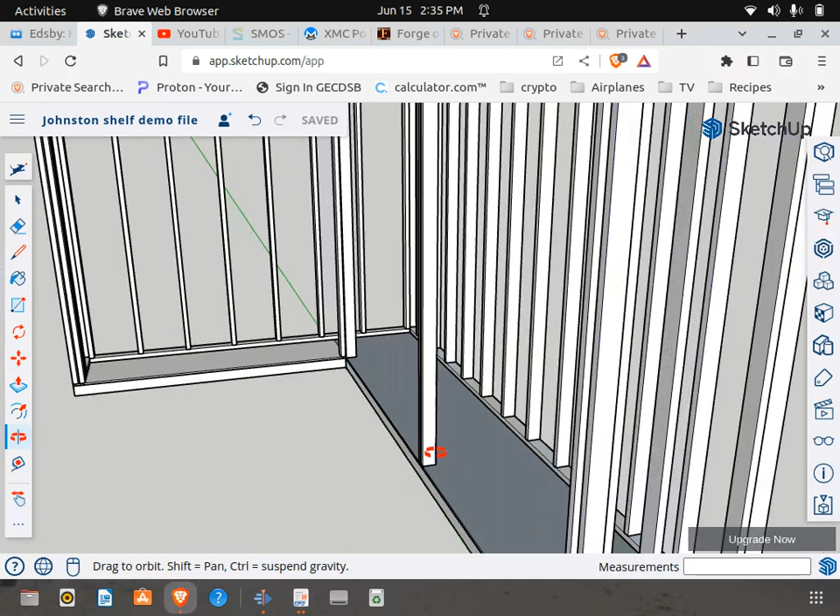So this lays out the location. I'm going to go over to here's my shelf right here. Now because the locations are given on this middle one, I'm just going to lay them out here. So let's just look here. The first shelf, the bottom, is located 3 foot 2 3/8.

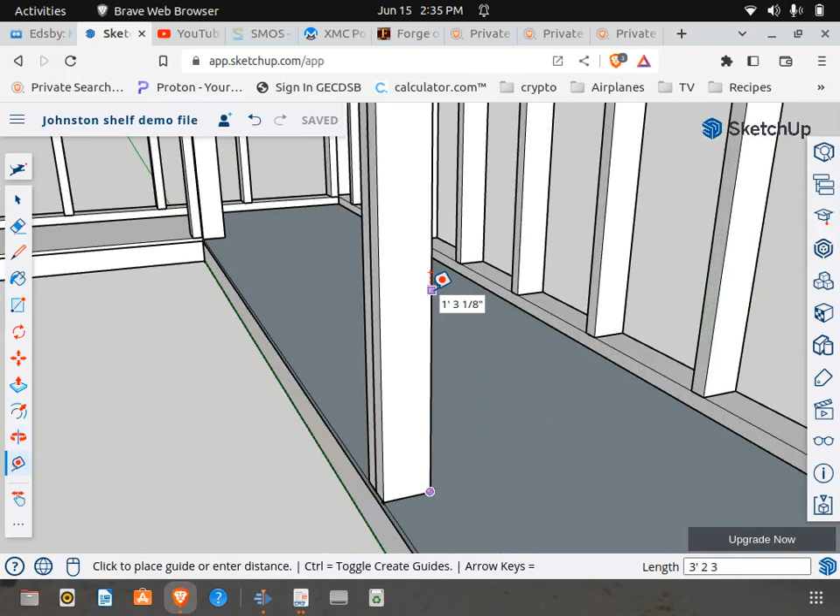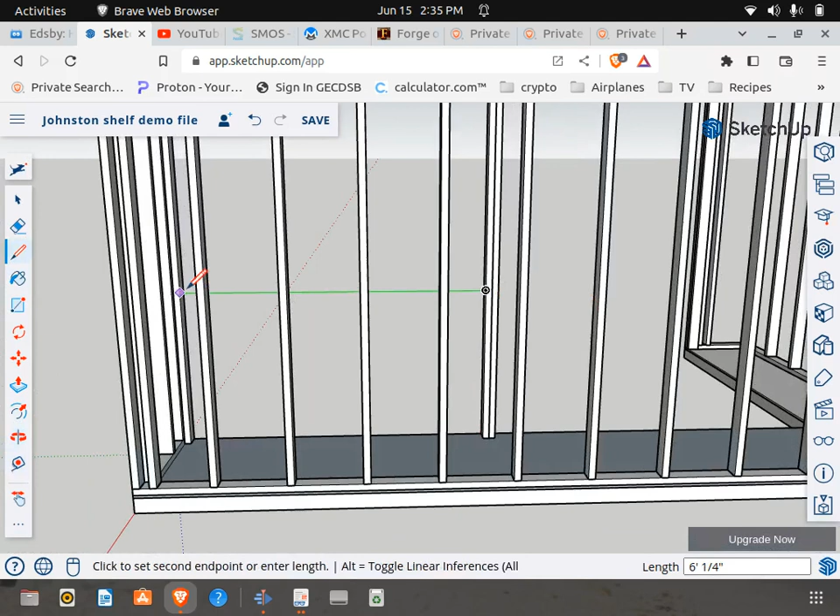So let's lay that out. Grab my measuring tape. 3 foot, 2, 3/8 of an inch. So we've got that. Now what I'm going to do, since I've got that, is make a quick line all the way to my corner, just like so.

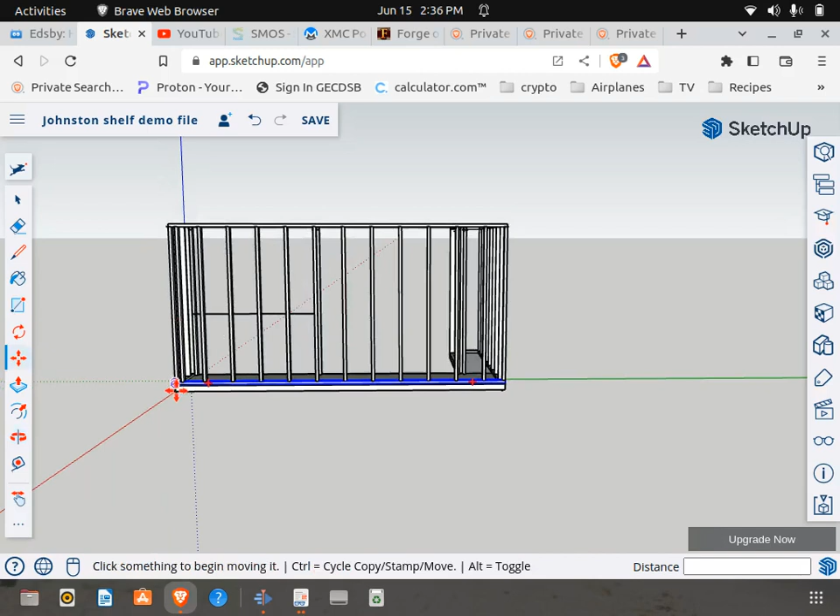Now there's two options. You can draw your boards, which is up to you, or you can use existing boards and edit them accordingly. I'm going to do option number 2. I'm going to grab this board. I know it fits because it's the longest board.

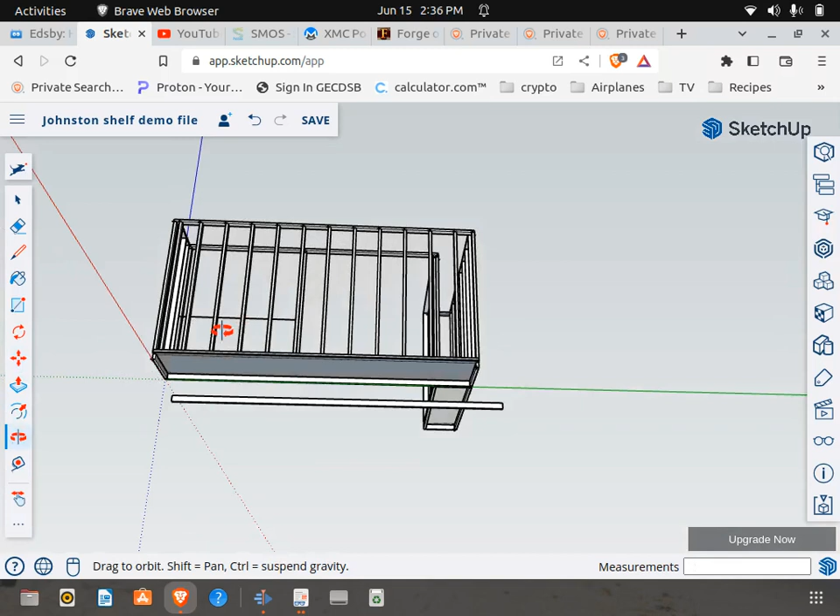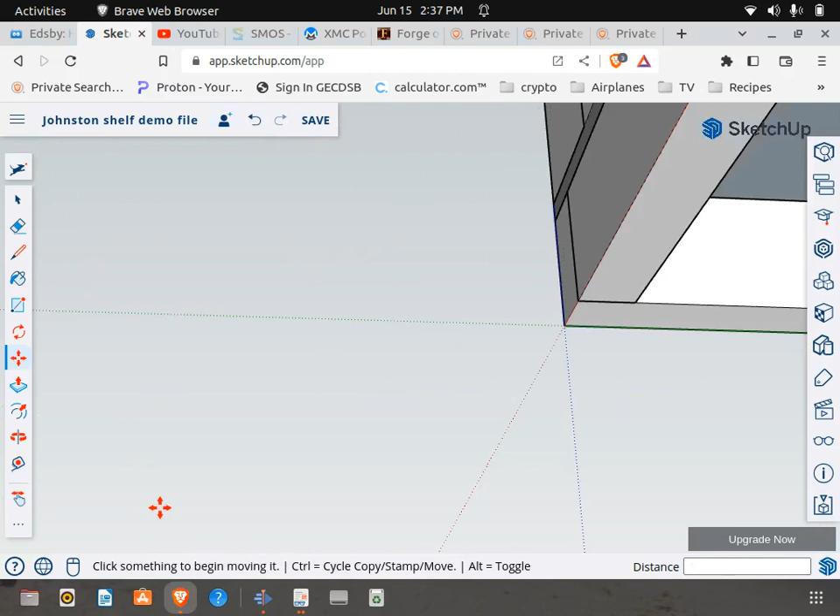Grab it by that corner. Actually, I'm going to grab it by the bottom corner because that measurement is for the bottom of the shelf, which would be that corner there. So let's cruise up into, oops, before I get too far. Looks like I didn't copy that. I accidentally moved it. Okay, there we go. Let's grab that corner and okay.

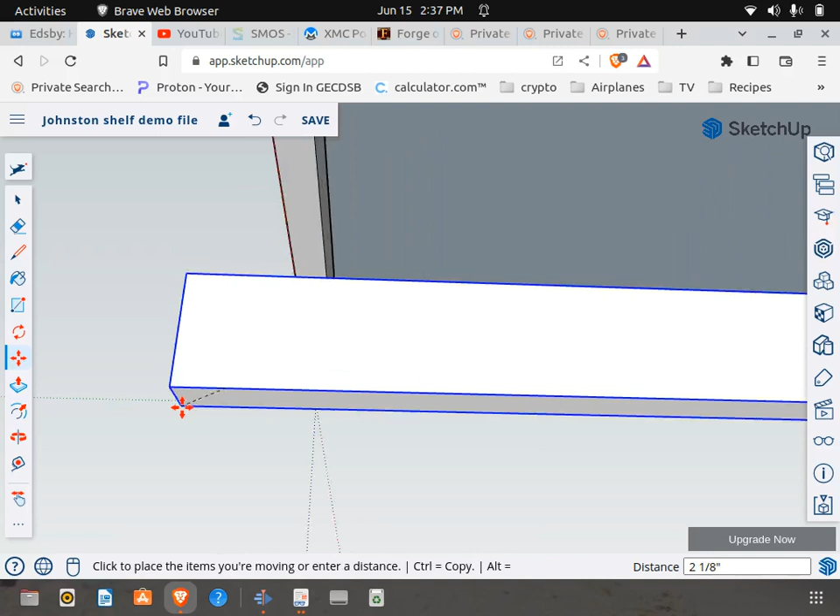Okay, another little, here we go, minor hiccup. Just get back there. Okay, drag along that line till you get to that corner. And that's where that bottom shelf is going to sit.

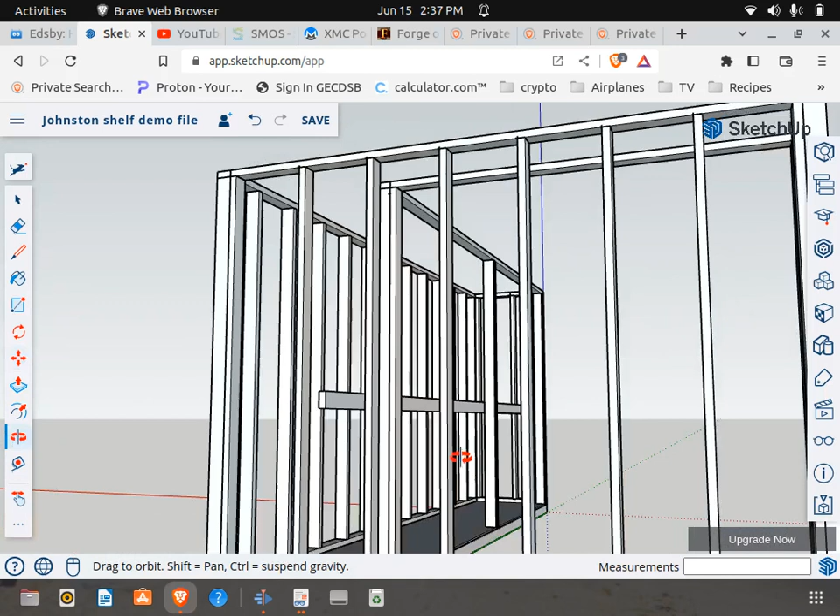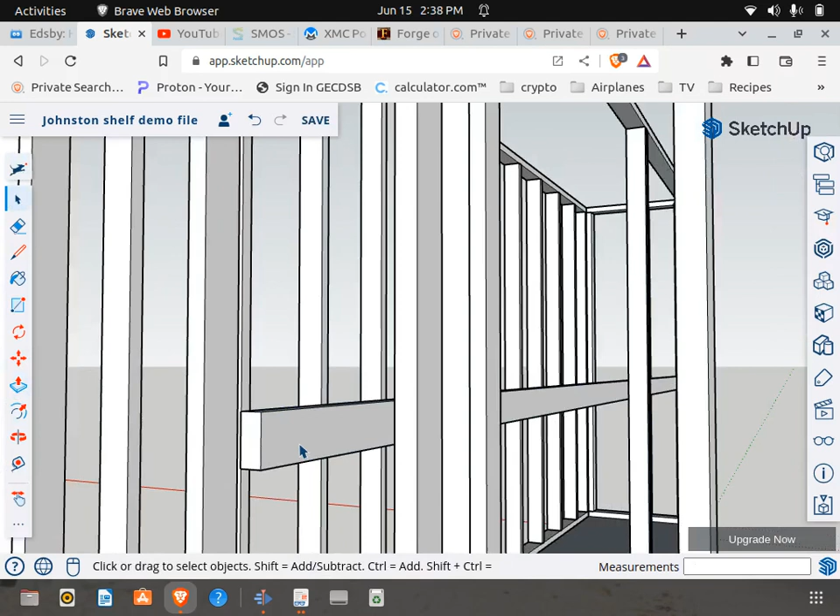Now obviously I'm not just going to leave it hanging like that. So what I'm going to do, I'm just going to make this unique on the off chance that, if it's not unique and we make any changes, the location that we took it from is going to receive the change as well. So let's just edit this now unique component. I'm going to push this back to about here. Sounds good.

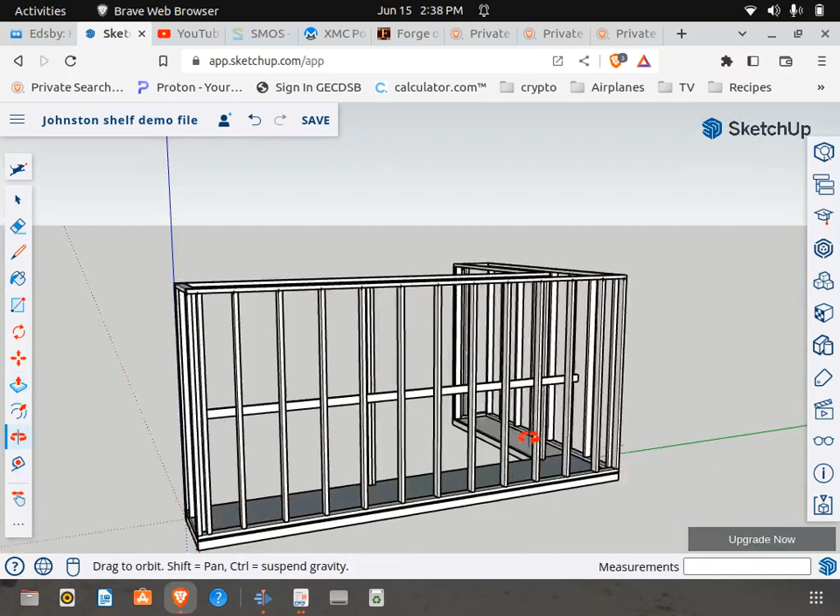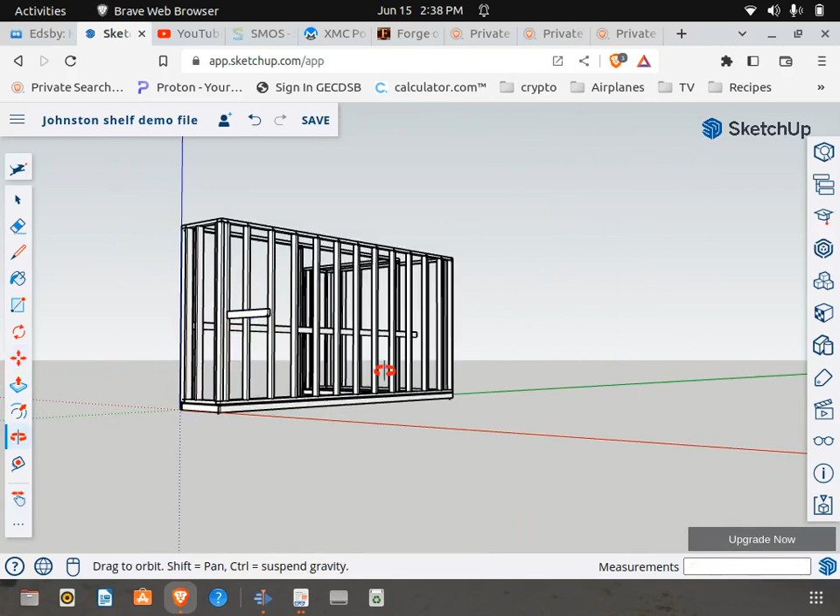So we've got our first board in. Now once again, I'm going to grab an existing board and copy it. So let's grab this one. Okay, making sure that we copied it, we didn't accidentally move it. And tell you what, before we forget, let's make that one unique.

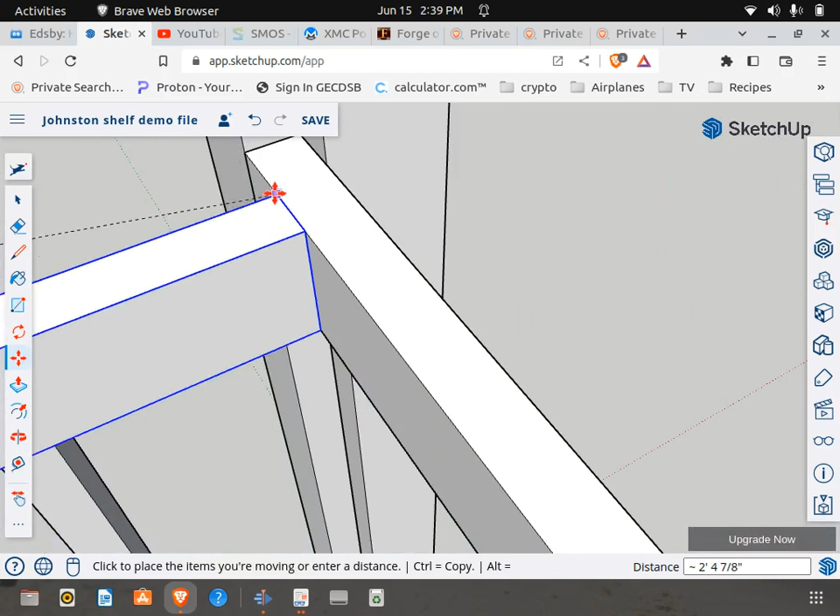I'm going to grab it by this corner here, and let's drop it off right next to this one here. Okay, wonderful.

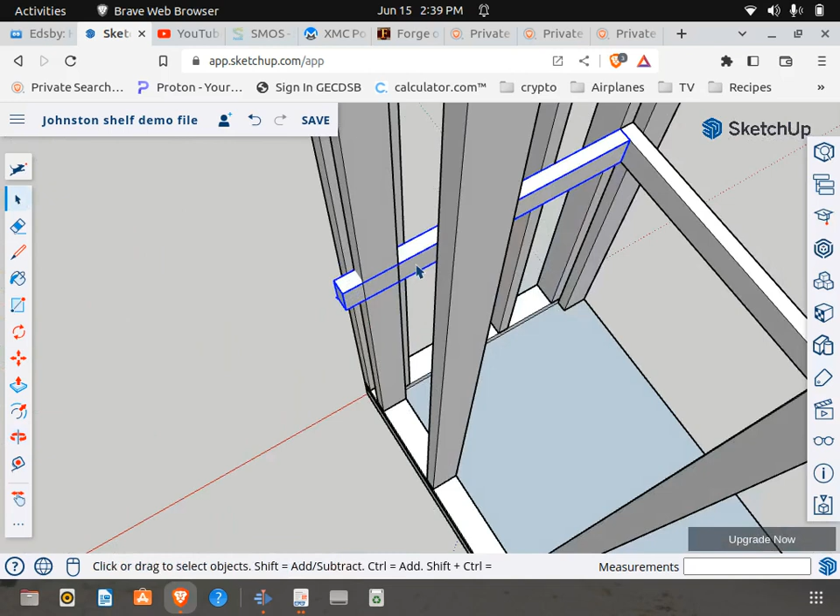Now what I'm going to do is, okay, so there's one of two things you can do. I'm going to edit this component for sure, and I'm going to push this back to this point here. And you see there's a space. The reason for that space is I would like to place the longboard in that corner.

So let's copy this one. Don't need to edit it because it's going to be the same, or it should be.

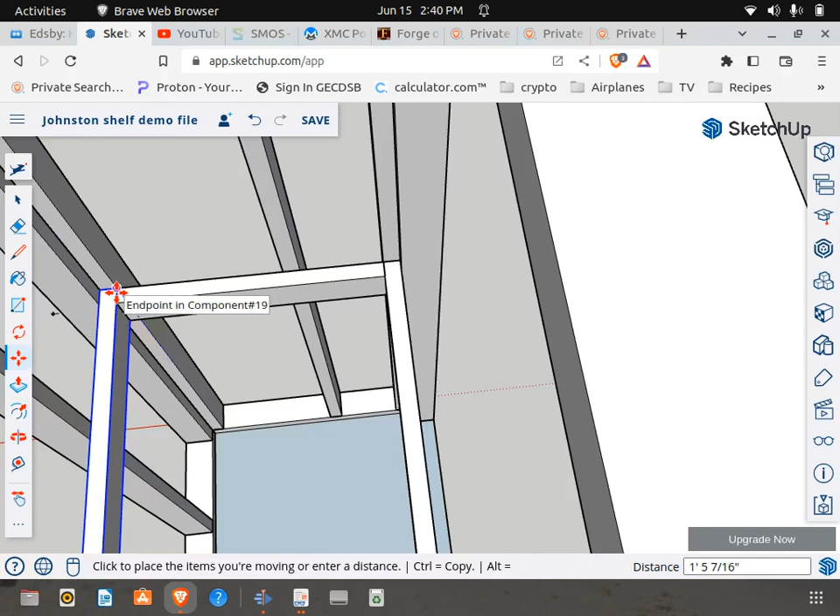Let's just make sure we've got our corners lined up. We do. Okay, let's spin this around and make sure everything fits in there nicely. It does. Okay, so let's grab that board over there.

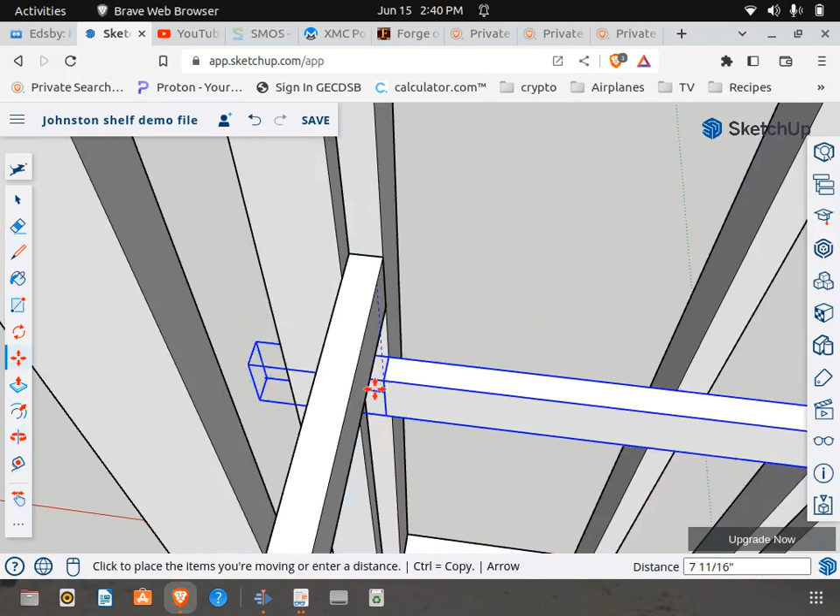And copy it. And let's just drop it off over here, just like so. And everything should line up nicely, just like that, and it does. Okay.

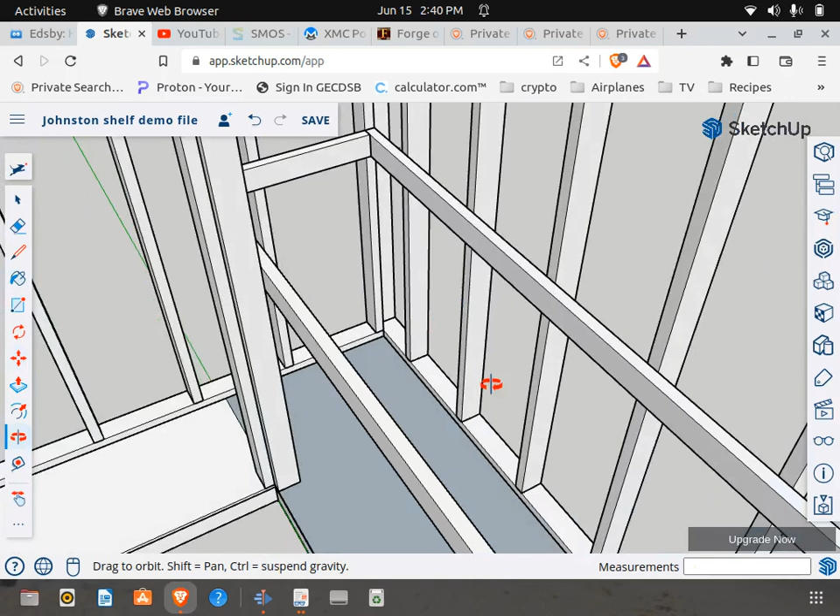Now it's our first shelf. So now what you're going to do, if we look at our instructions and scroll down here, there's our board. We're now going to add a 5/8 piece of plywood to this. There's a variety of ways you could do it, depending on how things work for you.

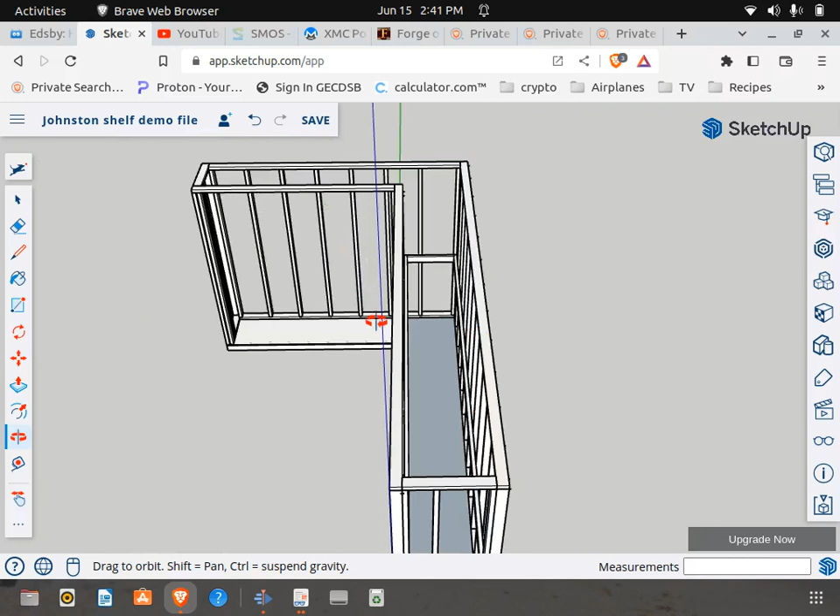Okay, so let's try our rectangle option and see if that will work for us. We'll just cruise this around and get in there, hit escape, and drop that off. Now let's see if it's going to let us bring the whole thing up. It does.

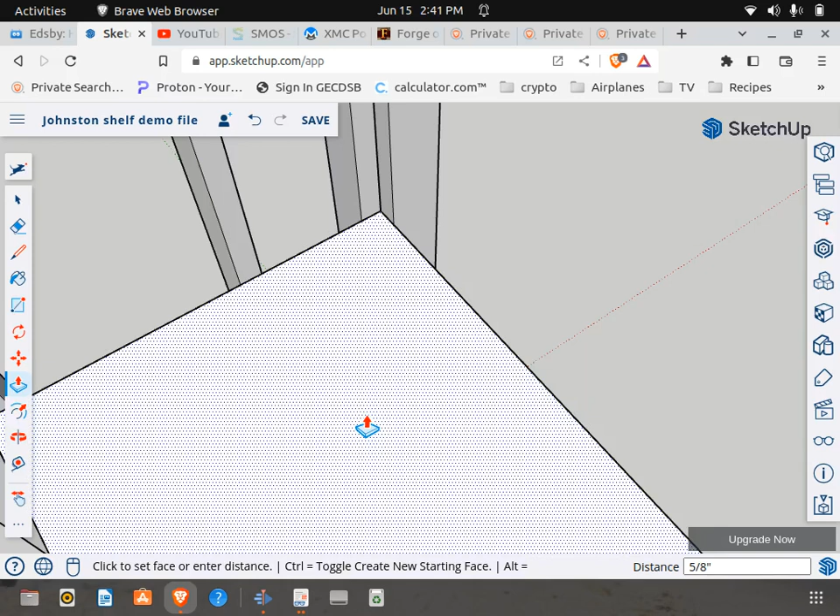5/8 inches. If I were to cruise around here, we could double check that. And there's our 5/8. Okay.

Now I'm going to do the Plan B version on the second shelf. So there is a second shelf, and if we check our instructions, it says that it's located 1 foot 9 11/16 from the top of that shelf that we just created.

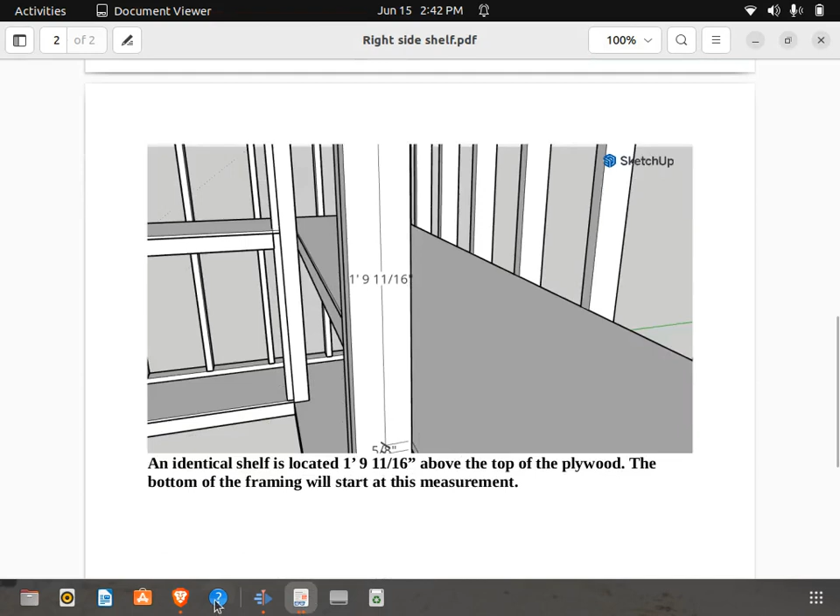So let's go over here, grab our tape measure, and we'll go 1 foot, 9, 11/16 inches. Okay.

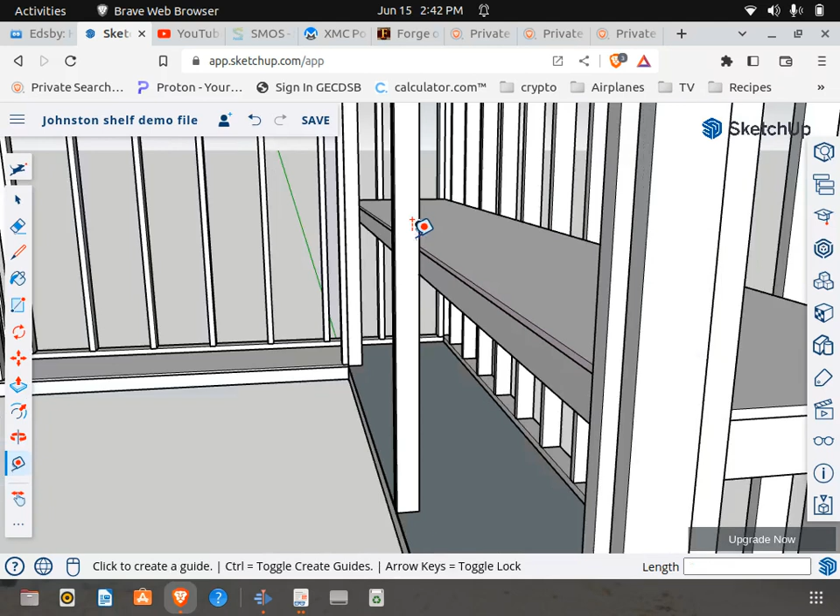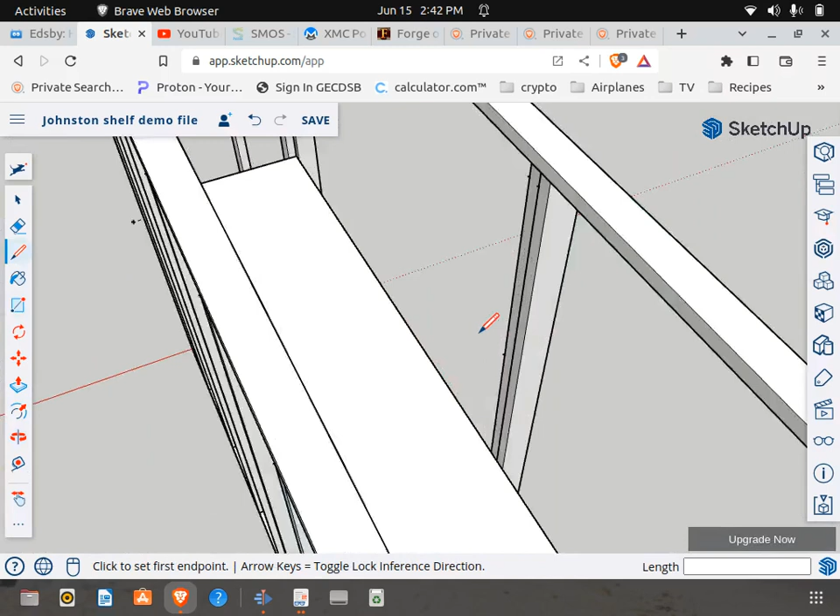Now it's worth noting, and I think I mentioned this previously, you could create these layout lines over in the corner. I just created them here in the instructions because it's a lot easier to see and it's a lot easier to recognize their origins. Otherwise, I'd have to zoom into a corner and it wouldn't be overly clear where that corner is. Okay, so let's just, I'm going to once again create a line.

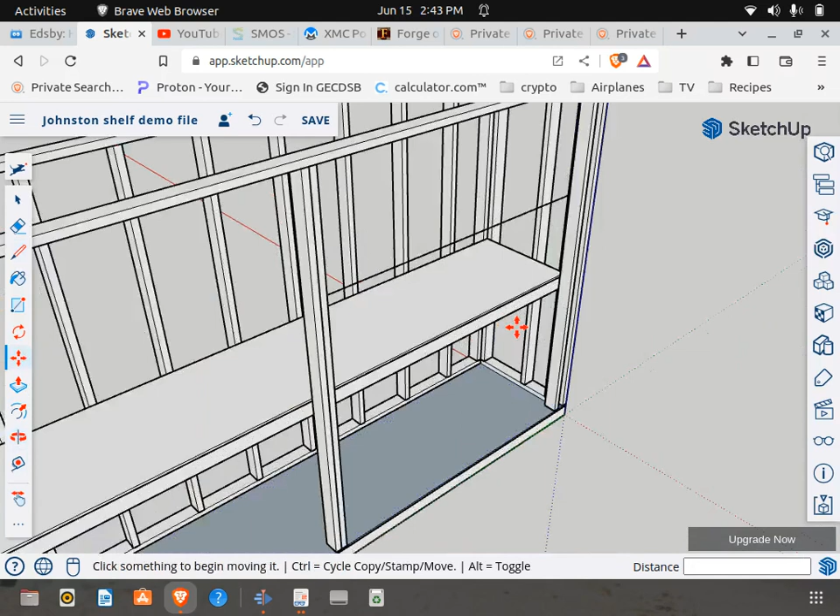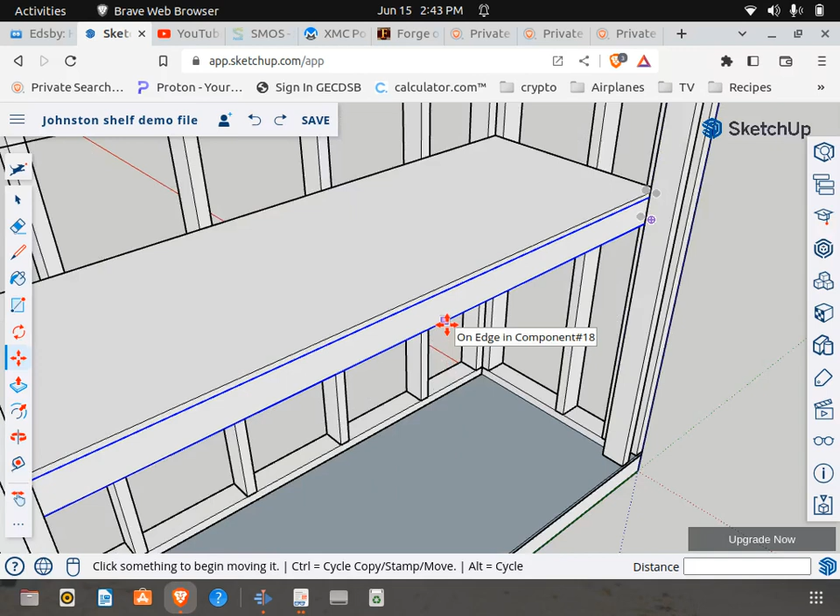There we go. Now this should go a little quicker. I say should. And let's just go in here and I'm going to copy this board. Let's grab it. Oops, I didn't copy it, looks like I accidentally moved it. So we'll undo that. Okay, there we go.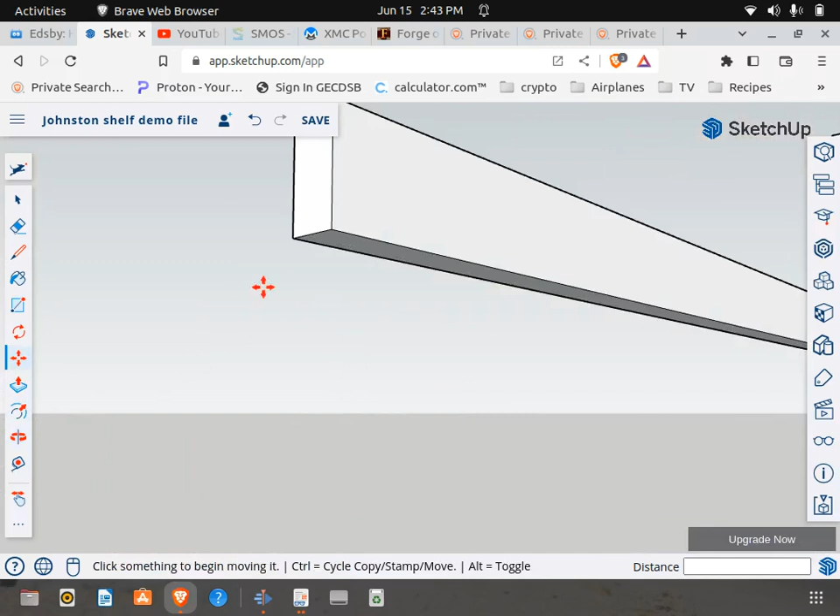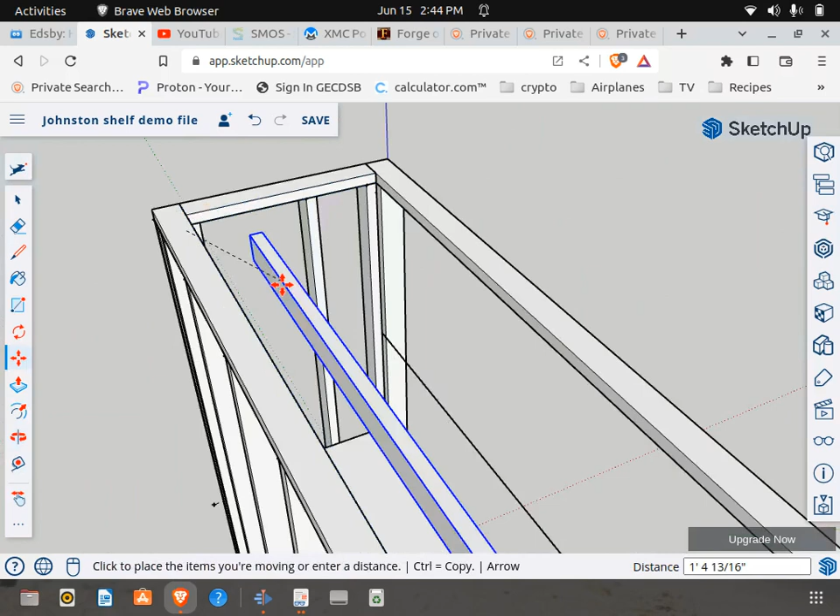Let's just position this like so. I'm going to come around here, and let's grab it by that bottom corner. Let's just position this so we can see this corner, and we can place it over on that corner. So that's nice, that endpoint is highlighted. Okay.

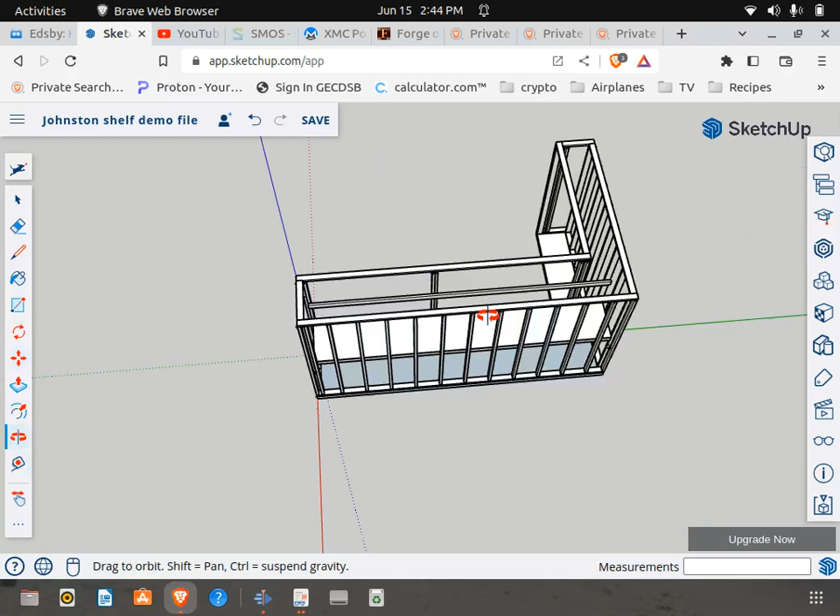So let's just cruise on over here, and let's copy this board here. Okay, grab it there, and we'll intersect it with that corner, just like so.

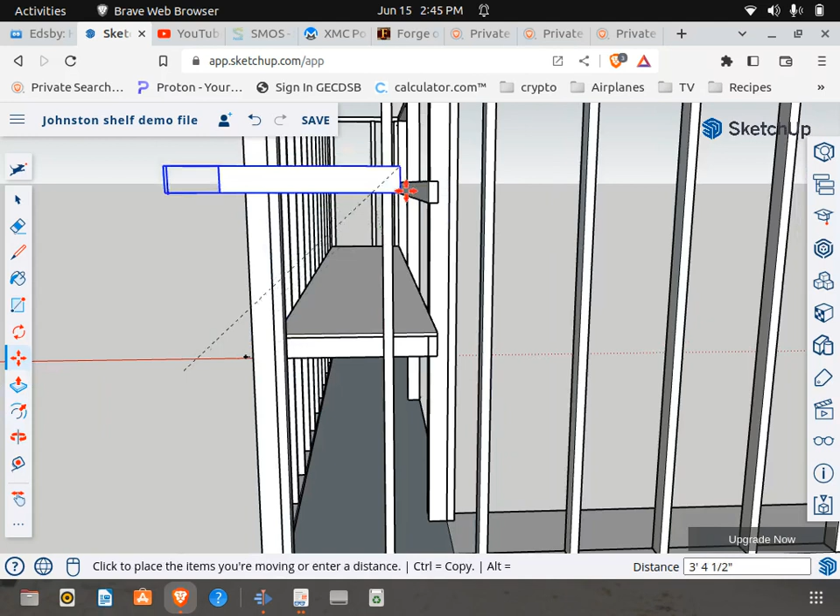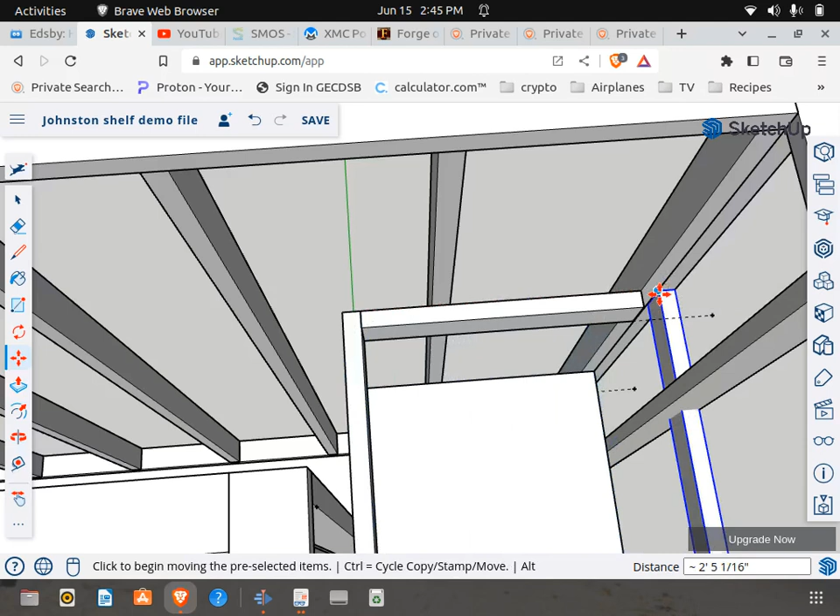And let's go in there, and let's copy this board. If it doesn't turn blue on you automatically, grab this and click it, and let's copy that over. And just like so. Okay, so now we're going to do the Plan B version of how to create your plywood.

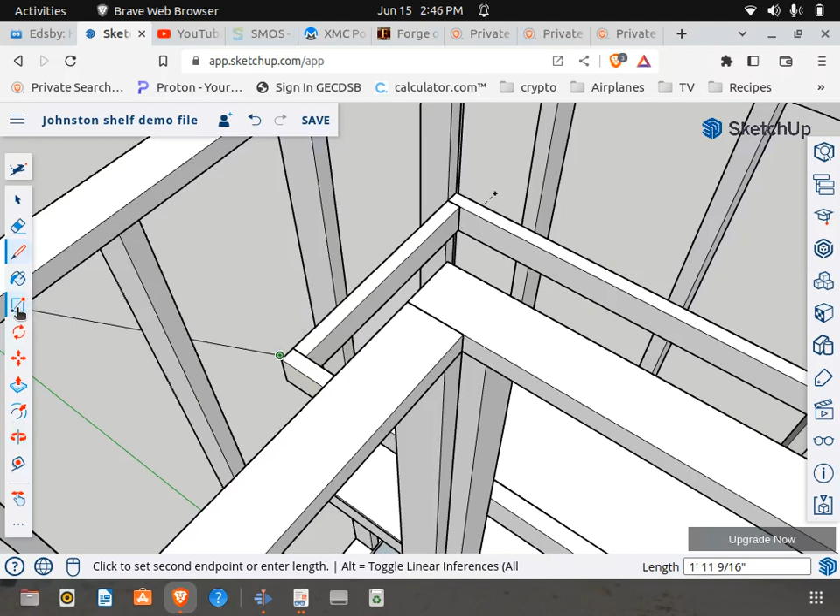So you can start this from any side. I'm going to start from over here, and in the event that you put a rectangle on top of it and it doesn't come up, or only partly comes up, you're having difficulties, so let's just do this. We'll go 5/8 of an inch, and we're going to create a vertical rectangle in this case. So let's just go over here, and here's our vertical rectangle.

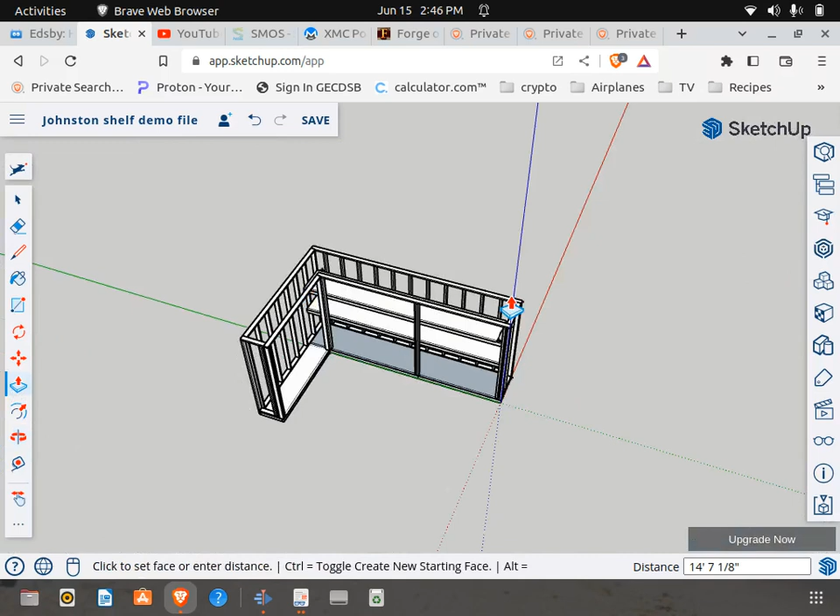And let's pull that. Hopefully let's pull the whole thing, as it does, and we'll pull this all the way over to that location there, and that will give us our second shelf. Okay, perfect.

And that's it for the Johnston Shelf shelves on the right hand side.